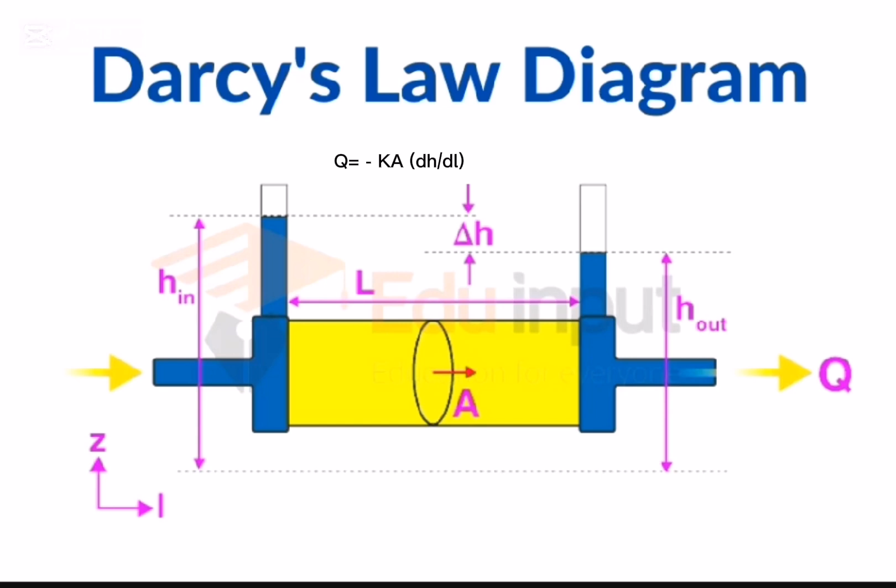So the law can be expressed mathematically as Q equals negative K times A times delta H over delta L, where Q is the rate of water flow, K is the hydraulic conductivity, A is the column cross-sectional area, and delta H over delta L indicates the hydraulic gradient. And here we have the difference in head and length between the manometers, the cross-sectional area, and the inflowing and outflowing. Then this is the porous medium.

In soil science, Darcy's law is crucial for understanding water movement through soil, and it is applied to measure soil permeability and design efficient irrigation and drainage systems. It manages soil water retention and movement, predicts contaminant transport, and controls soil erosion by quantifying the flow rate of water through soil using parameters like hydraulic conductivity, hydraulic head difference, and soil column length. Darcy's law helps in various practical applications such as optimizing irrigation schedules, preventing waterlogging, and mitigating groundwater contamination risk.

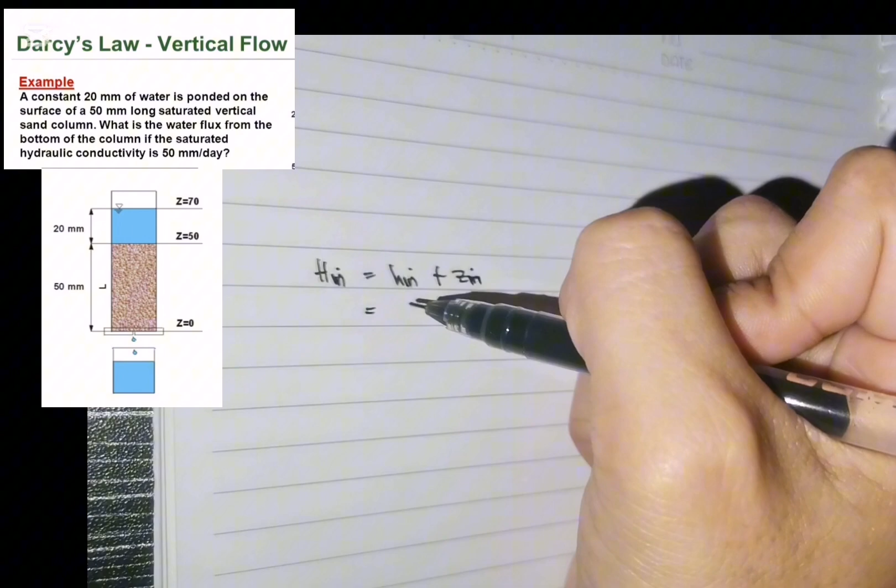So first, we need to define a convenient reference level and designate it as Z equals 0. This is the reference level at the bottom of the sand, Z equals 0. Then calculate the difference in hydraulic head across the soil length. So we have here H sub in is equal to h plus Z, so we have 20 mm plus 50 mm, that will be 70 mm. And for the H sub out, we don't have any value for this, so automatically we put 0.

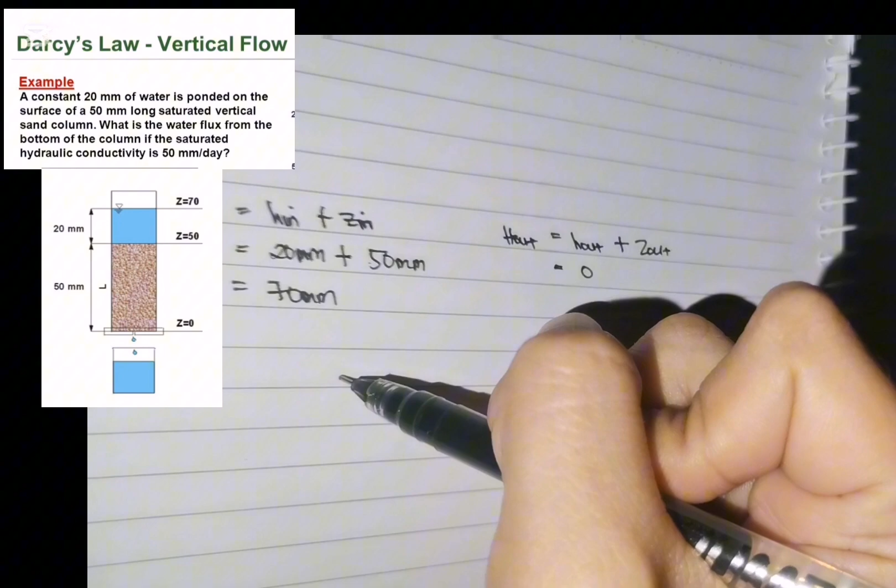And then with this data we can solve the difference in head. So delta H is equal to H sub in minus H sub out. So that will be 70 minus 0, so we have 70 mm. And next is to calculate the hydraulic gradient. So we have here i is equal to delta H over delta Z. So delta H is 70 mm and delta Z is 50 mm, and you can get the value of 1.4. Then calculate the flux.

J sub W is equal to negative K sub S times the gradient, where J sub W is the water flux density and K sub S is the saturated hydraulic conductivity. So we have here 50 times 1.4, the hydraulic gradient, and that will be negative 70 mm per day. With this, we have the negative sign so that the flux is downward.

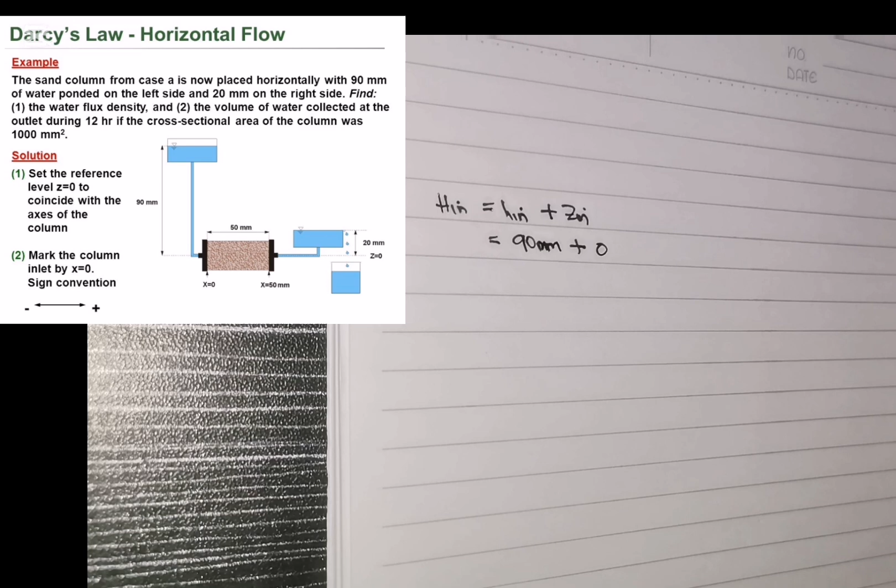So we have here again, the head sub 1 is 90 mm plus 0. We don't have a value in z sub in because we leveled it at the inlet by x equal to 0, so we get 90 mm. For h sub out, we have the head sub 2 equal to 20 mm, and same, we don't have a value for z sub out, so that will be 20 mm. Now we can solve the difference in head. Delta h is equal to h sub in minus h sub out, so that will be 90 minus 20 mm, so we get a value of 70 mm.

Next is to calculate the hydraulic gradient. I is equal to delta h over delta z, so that will be delta h is 70 mm and delta z is this one, 50 mm. So we can get 1.4 for the hydraulic gradient.

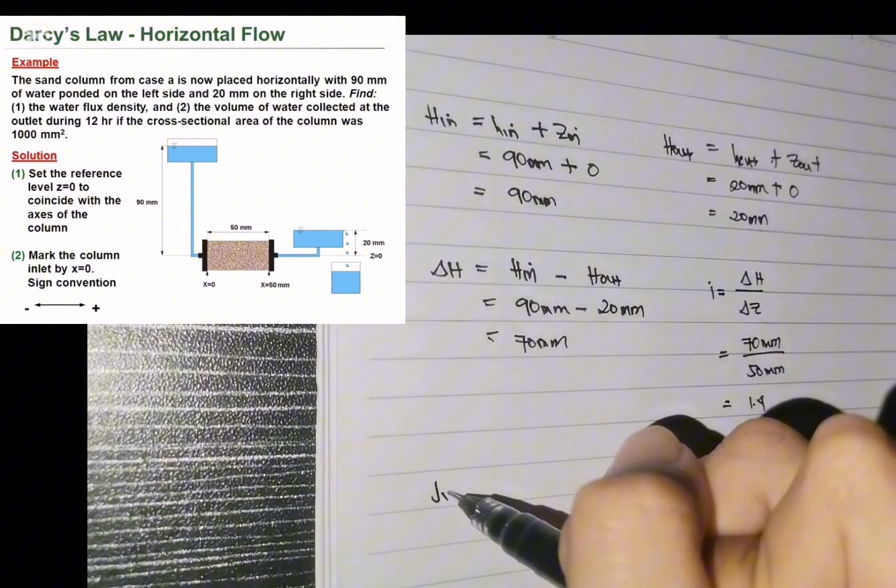Next is calculate the flux. J sub W is the water flux density, and J sub W is equal to negative K sub S times the gradient. So we can copy the sign, 50 times 1.4, and then we can get 70 mm per day or 2.917 mm per hour.

And the last is calculate the cumulative volume of flow. So we have J sub W equal to V over A times T. Derive that formula into V equal to JW times A times T. So with that formula, we can get V equal to 1000 times 12 hours times 2.917, and we get the value of 35004 mm³.

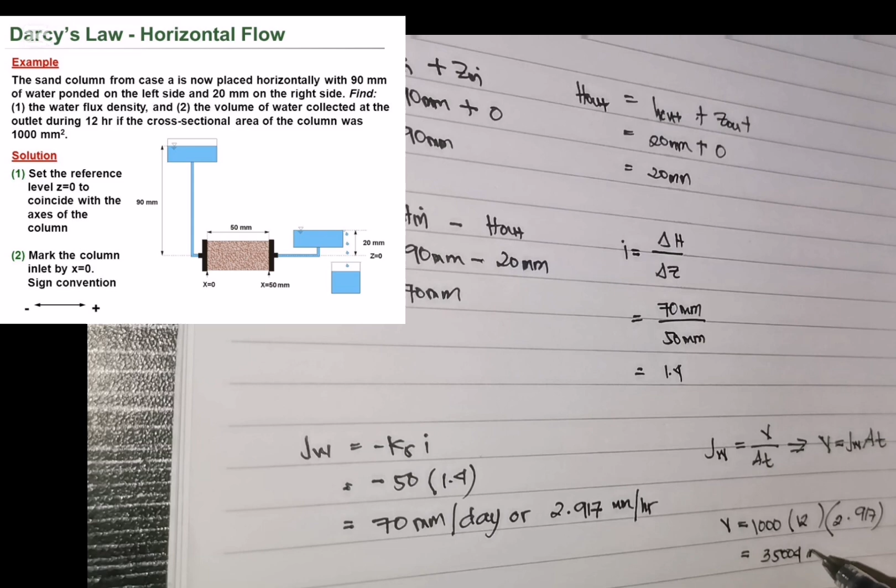So next is groundwater flow in confined aquifer. What is a confined aquifer? A confined aquifer is a geologic formation, sediment, or rock that contains a body of water trapped within sediment underneath the ground by at least one confining layer. So a confined aquifer is a geologic formation, sediment, or rock that contains a body of water.

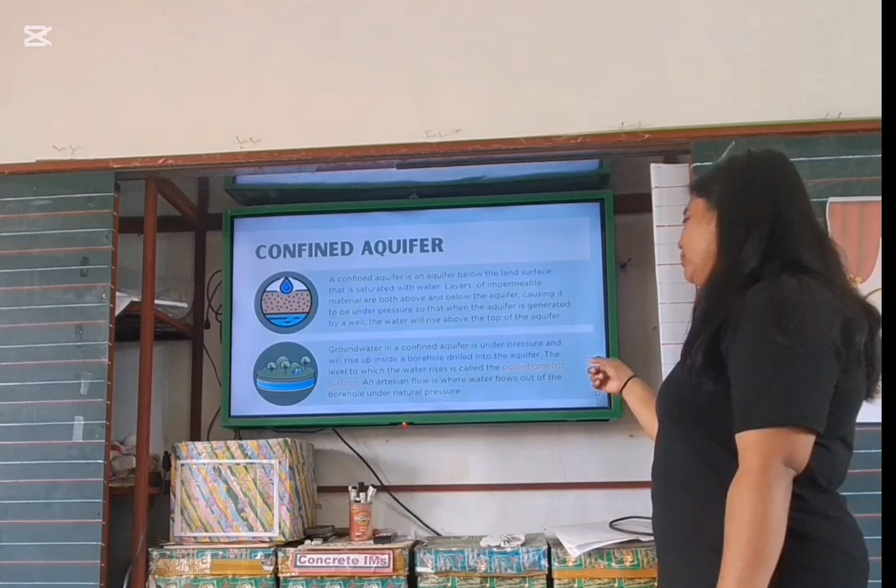An artesian flow is where water flows out of the borehole under natural pressure.

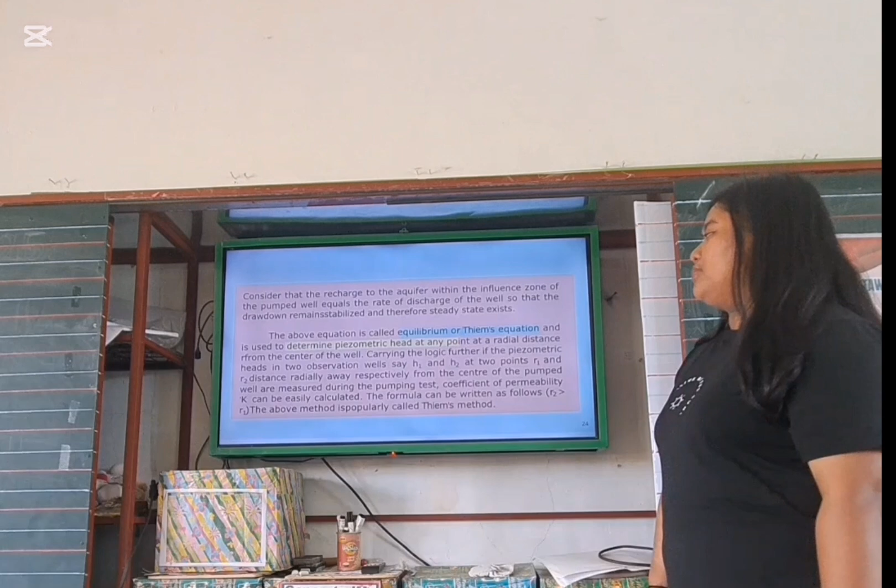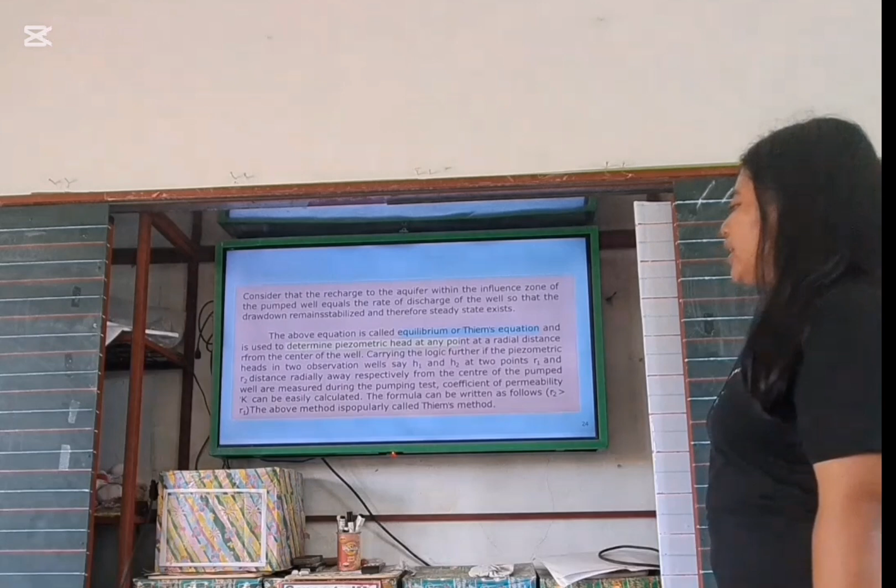Carrying the logic further, if the piezometric heads in two observations, H sub 1 and H sub 2, at two points R sub 1 and R sub 2 distance radially away respectively from the center of the pump well, are measured during the pumping test, coefficients of permeability, K, can be easily calculated. The formula can be written as follows, where R sub 2 is greater than R sub 1. The above method is popularly called Thiem's method.

So this is Thiem's equation now. Calculations of discharge, you can find the aquifer using Thiem's formula for steady radial flow. For steady radial flow, the discharge through a confined aquifer can be calculated from the formula. So what is the formula, guys?

So, steady state radial flow to wells, Thiem equation. Let's do the drawing first. So the formula here is: Q equals 2 pi K times B times S sub 1 minus S sub 2, over Ln of R sub 2 over R sub 1. And K equals Q times Ln of R sub 2 over R sub 1, over 2 pi times B times S sub 1 minus S sub 2.

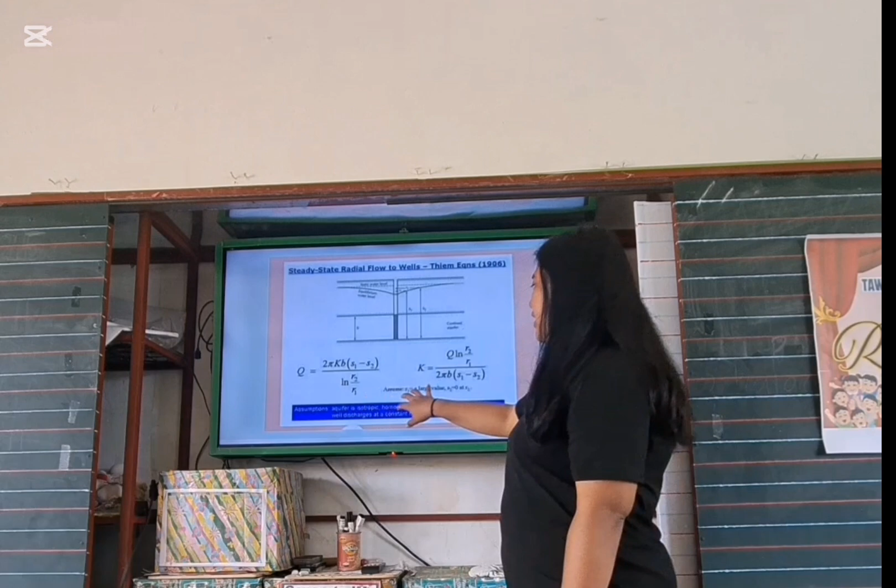The sample problem is: a well is fully penetrated into a 50 feet thick confined aquifer. Water is pumped out at a steady rate of 500 gallons per minute until the following drawdown cone of depression is formed. The initial water level was 100 feet before pumping. Find the hydraulic conductivity in feet per minute for the aquifer.

So here's the drawing, and here's the figure. Now here's the solution. The formula to use is Q equals 2 pi times T times H sub 1 minus H sub 2, over ln of R sub 1 over R sub 2. So let's convert this to get it in feet per minute: 500 gallons per minute times 0.13 feet cube per gallon equals 67 feet cube per minute.

Then, kanina, i-apply na ito siya ng formula. Kuha na siya. So, 67 feet cube per minute equals 2 pi times T. Of course, ang unknown diri is ang T. So, 98 feet minus 80 feet. Why 98 there? Because 100 minus 2 is equals to 98. 100 minus 20 is equals to 80. Ato H sub 1 is 98 feet. Ang ato H sub 2 is 80 feet. Over ln, 400 feet divided by 40 feet. So, T is equals to 1.364 feet squared per minute.

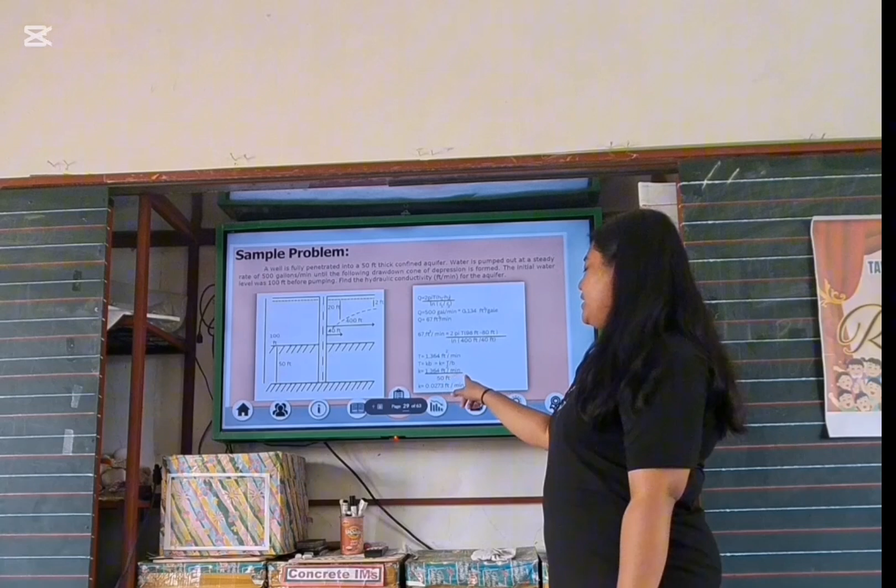So, cancel na siya, feet. So, squared na lang nabilin, kaya cube na siya. T equals KB, so K equals T divided by B. So, since given naman siya ang T, kanya itong gamiton. If wala ang T, mo na siyang formula itong gamiton. Pero ang missing is K man, so, ang atong gigamit ng formula, and given ang T, kanya itong gamiton. So, K equals ang T, of course, kay 1.364 feet squared per minute divided by B. So, atong B is 50 feet. So, K equals 0.0273 feet per minute.

So, mao ito siya itong answer, guys. So, why feet per minute na siya? So, feet squared man na siya, no? So, cancel lang isa ka feet. So, mabilin lang dyan siya feet per minute.

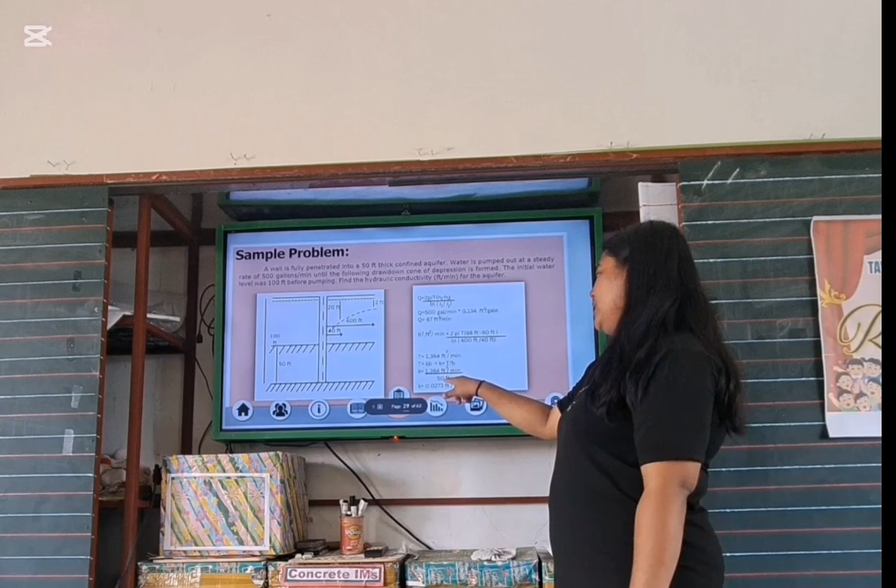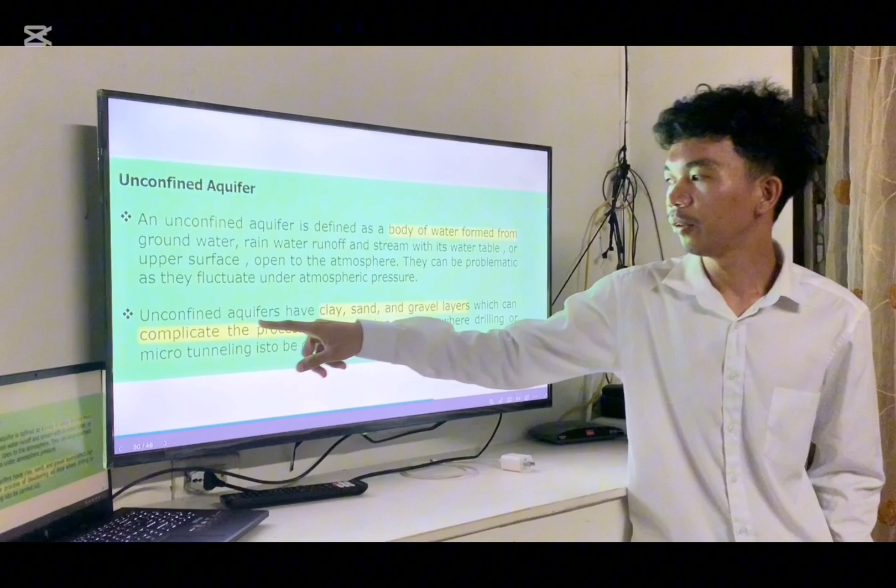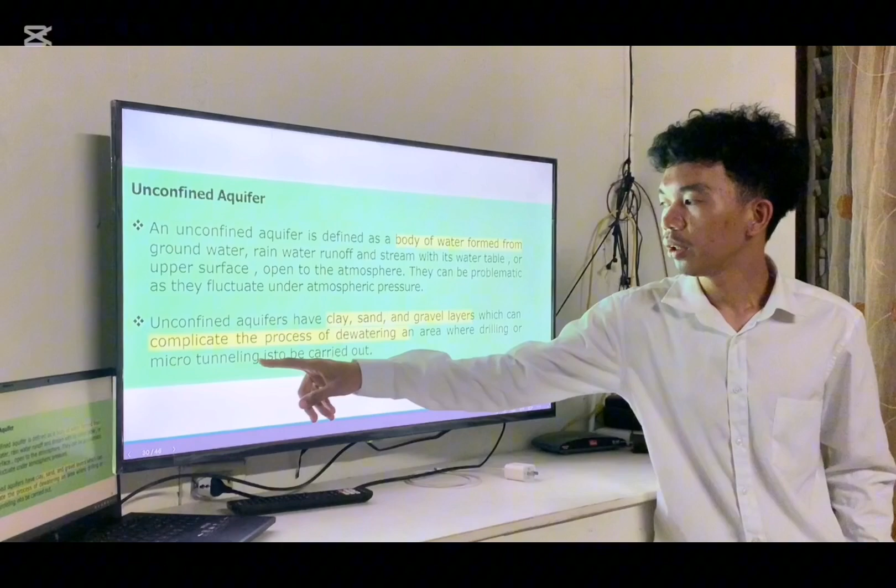Karon atong discuss ang groundwater flow in unconfined aquifer. So, what is unconfined aquifer? So, discuss na ito sa definition sa unconfined aquifer. So, the unconfined aquifer is defined as a body of water formed from groundwater. So, it means it is a form of water nga na-infiltrate from the rain. So, rainwater runoff and stream with its water table or upper surface open to the atmosphere. It can be problematic as it fluctuates under atmospheric pressure. And also, unconfined aquifers have clay, sand, and gravel layers. So, it means ang unconfined aquifer consists of clay, sand, and gravel layers, which can complicate the process of dewatering an area where drilling or microtunneling is to be carried out.

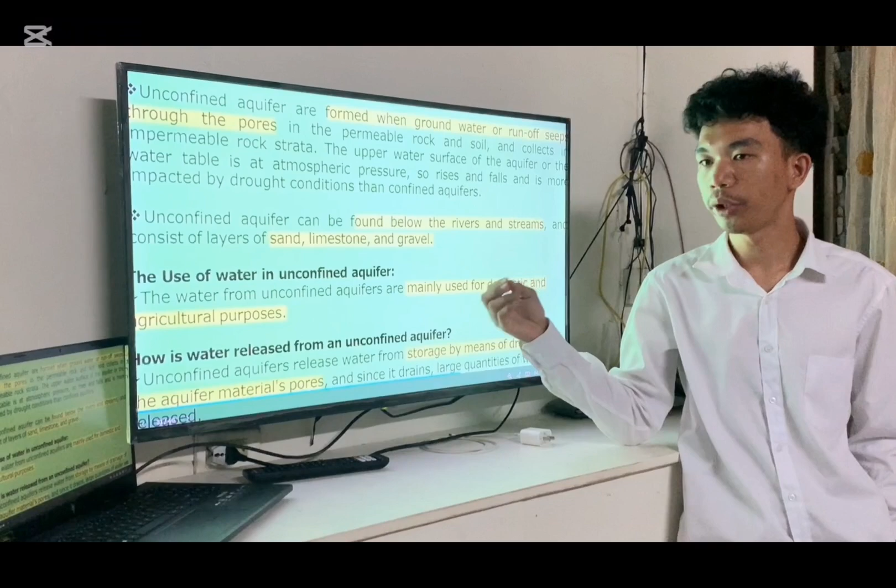And also, unconfined aquifers are formed when groundwater or runoff seep through the pores. So, because of the infiltration from the rain. The upper water surface of the aquifer or the water table is at atmospheric pressure. So, it rises and falls and is more impacted by drought conditions than confined aquifers. So, it means from the word pressure, ang unconfined aquifer is nag-differ po siya about sa pressure. In that particular area, for example, if that particular area has a high pressure, it means mas dako po ang discharge rate sa water. And if it is low pressure, then low po ang discharge rate.

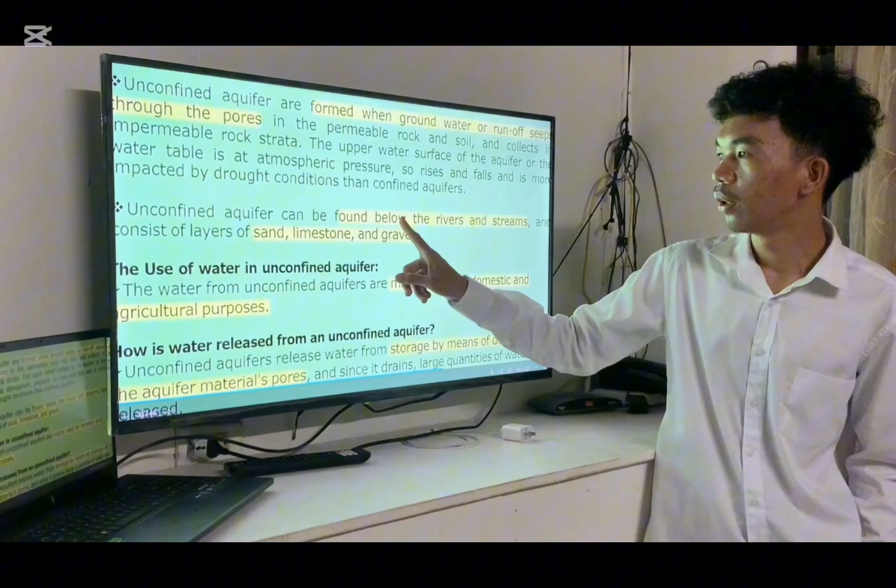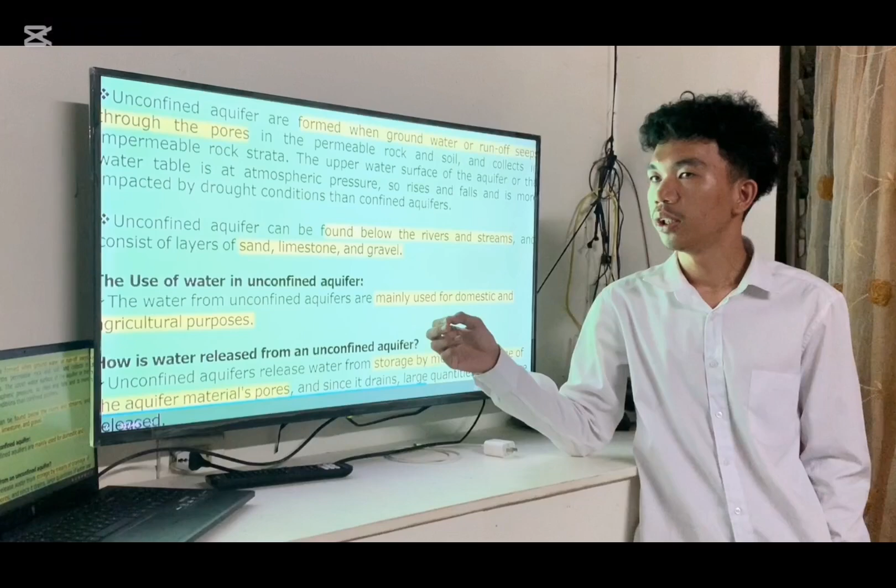And also, unconfined aquifer can be found below the rivers and stream and consists of layers of sand, limestone, and gravel. So now proceed tayo sa uses sa water sa unconfined aquifer. So, the water from unconfined aquifers are mainly used for domestic and agricultural purposes. So, dako kay tabang ang unconfined aquifers because of this one, agricultural purposes. Like for example, sa mga basakan. Diba, ang pananum is need sila of water, then magdigra ka og sa land surface para makakuha og water.

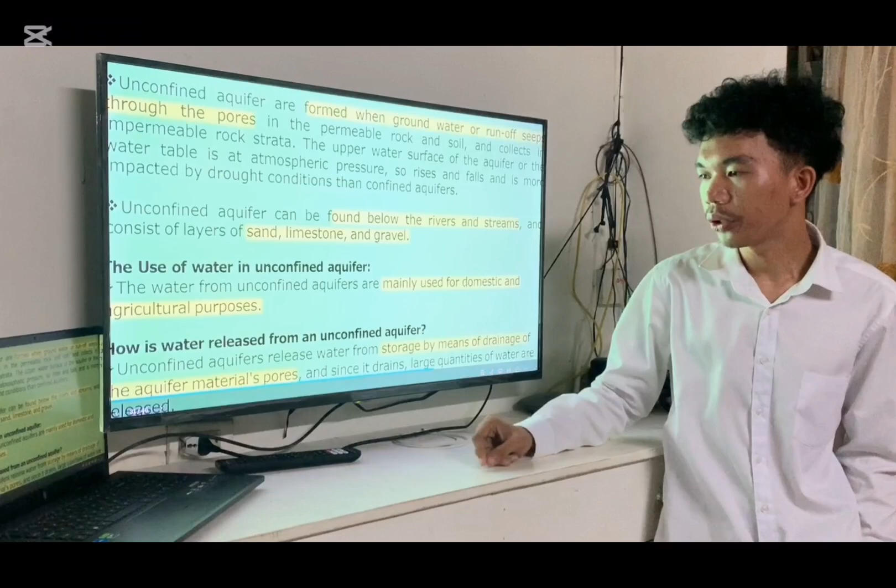Then, how is water released from unconfined aquifer? Unconfined aquifers release water from storage by means of drainage of the aquifer material pores. And since it drains, large quantities of water are released. So, it means ang water ma-release siya through storage. And if maano siya, drain, then there's a lot of water nga ma-release po siya.

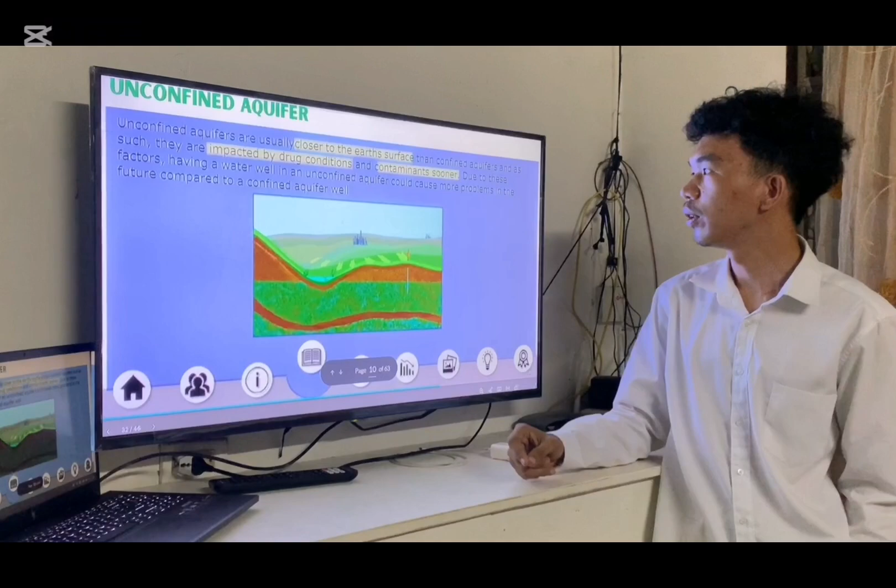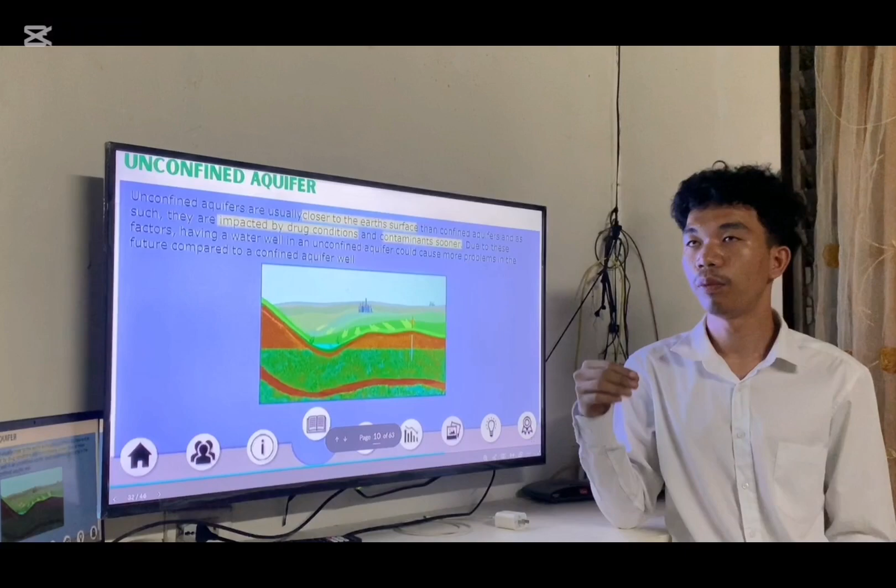Now proceed ta sa, as you can see here, na illustration about sa unconfined aquifer. So, unconfined aquifers are usually closer to the Earth's surface than confined aquifers, and as such, they are impacted by drought condition and contamination. So, it means ang unconfined aquifers is mas dulo sa land surface. So, i-explain nato, it means mas prone sila sa mga pollutant or something like that, kay mas dulo sila sa land surface, which is sa mga human-made activities. Para din ang water quality nila, dili siya totally clear because of mas dulo sila sa land surface compared sa confined aquifer daw.

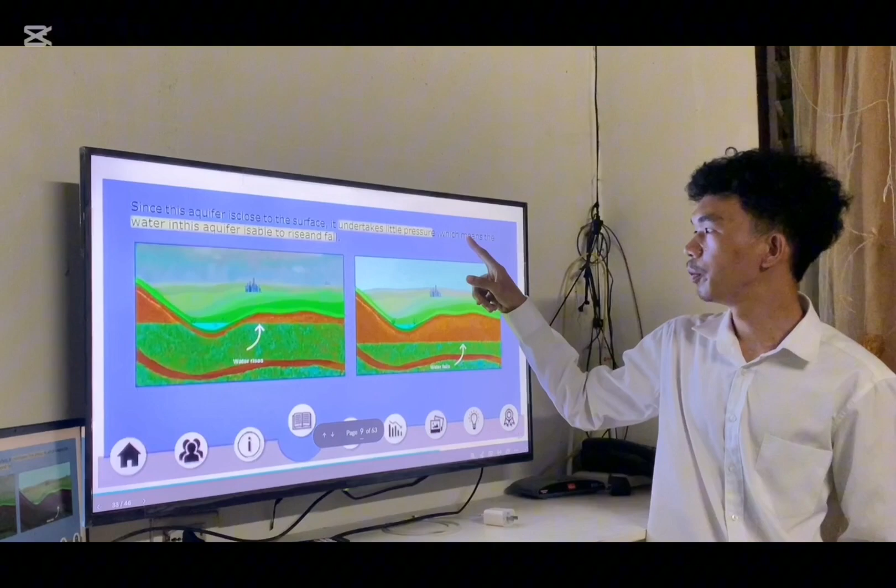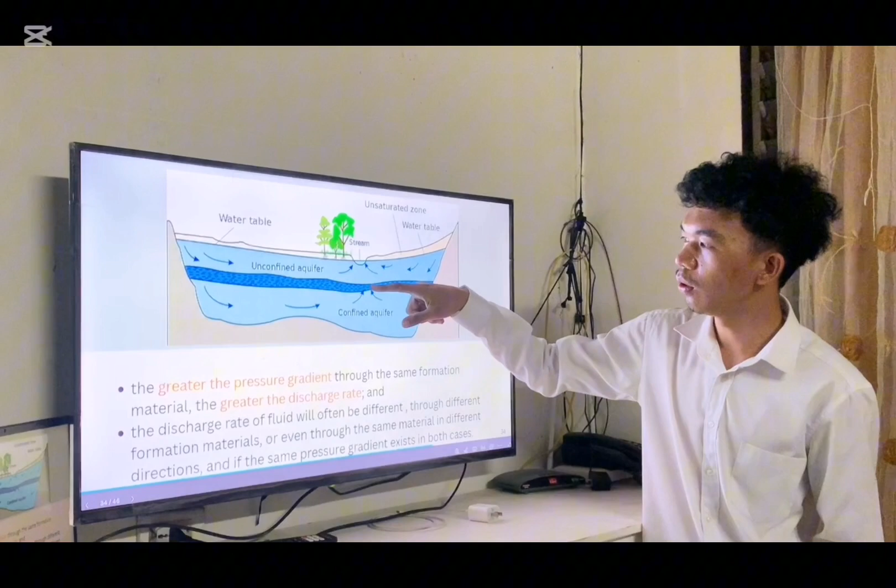Since this aquifer is close to the surface, it undertakes little pressure, which means the water in this aquifer is able to rise and fall. So as you can see here, ang water may rise because of having a high pressure. And diri, ang water nipaubos because of na siya low pressure. So now proceed ta diri. So as you can see sa illustration, this one is the water table, and this is the unconfined aquifer. Then below the unconfined, gitawag din siya og confining bed. And also below the confining bed, it is called confined aquifer.

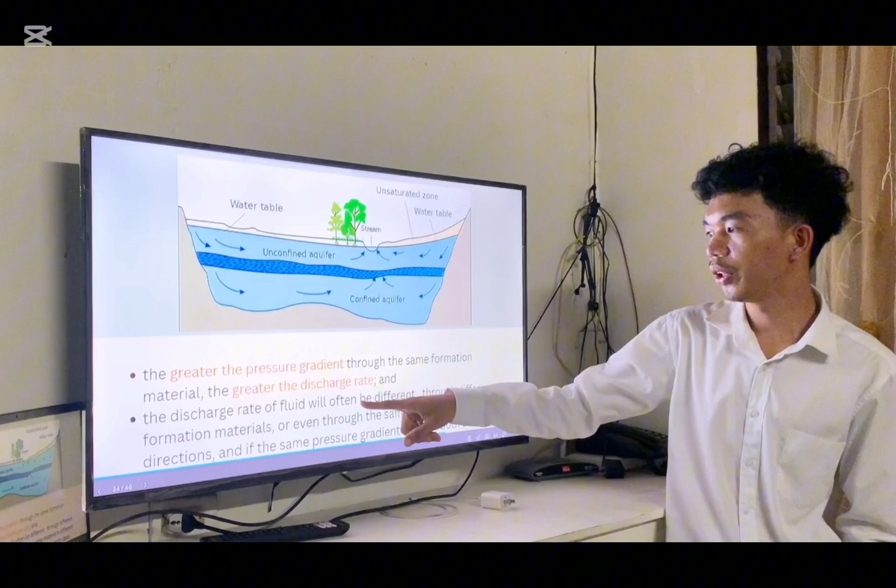So, the greater the pressure gradient through the same formation material, the greater the discharge rate. So, if ang pressure nag-contain siya og high pressure, ang discharge rate po is mas dako. And if it is lowest, then the discharge rate also lowest. So the discharge rate of fluid will often be different through different formation materials or even through the same material in different direction, even if the same pressure gradient exists in both cases.

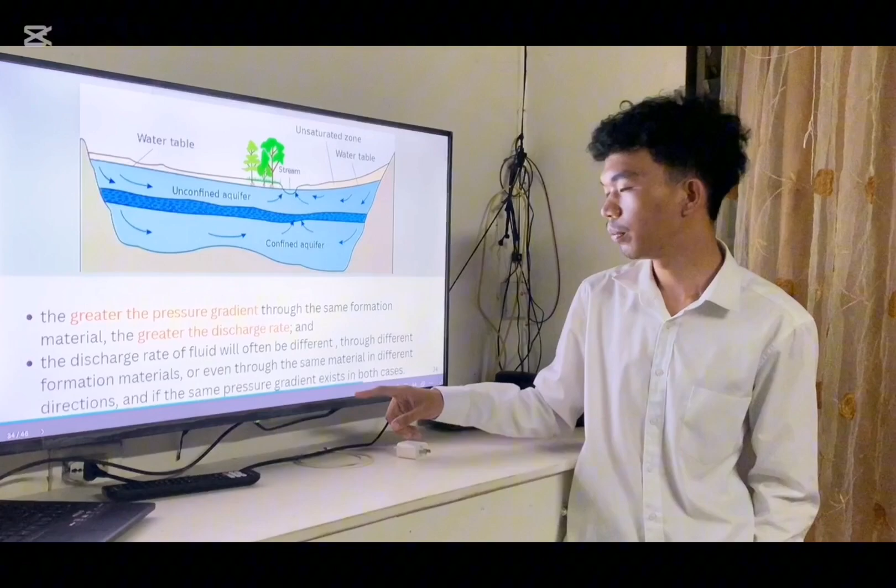Now let's proceed to the question. How does an unconfined aquifer recharge?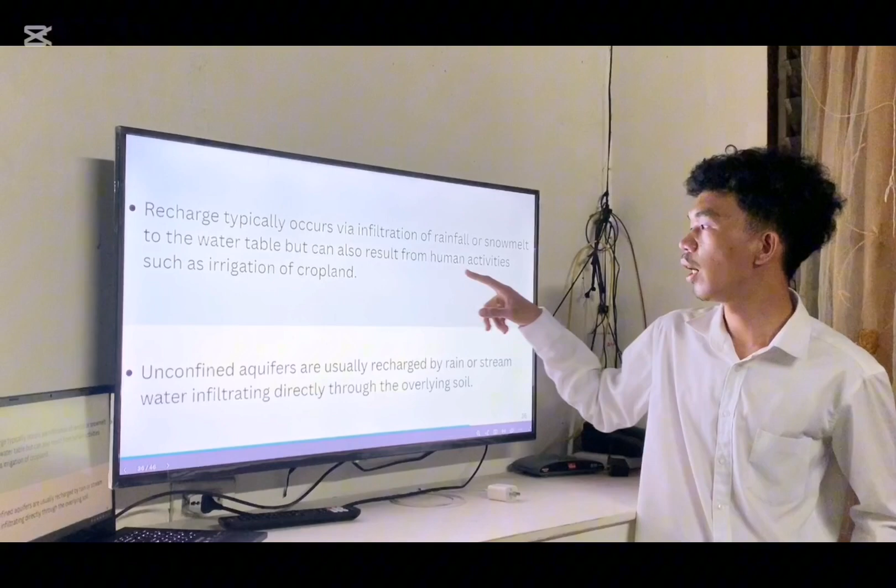Typically, an unconfined aquifer is recharged through infiltration of rainfall. For example, if it rains heavily, water from the rain moves toward the land surface, enters the pores of the land, and reaches the placements of the unconfined aquifer. It can also result from human activities such as irrigation of cropland. Unconfined aquifers are usually recharged by rain or streams, with water infiltrating directly through the overlying soil.

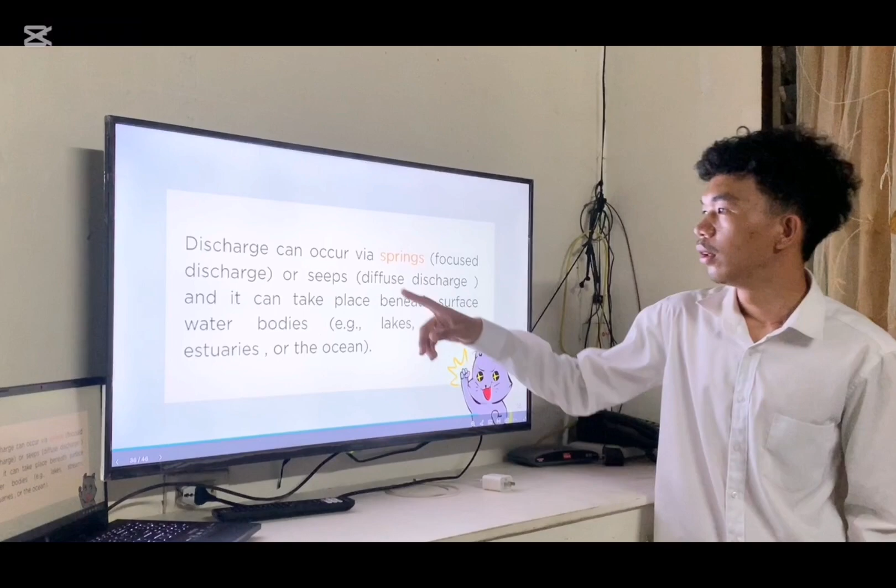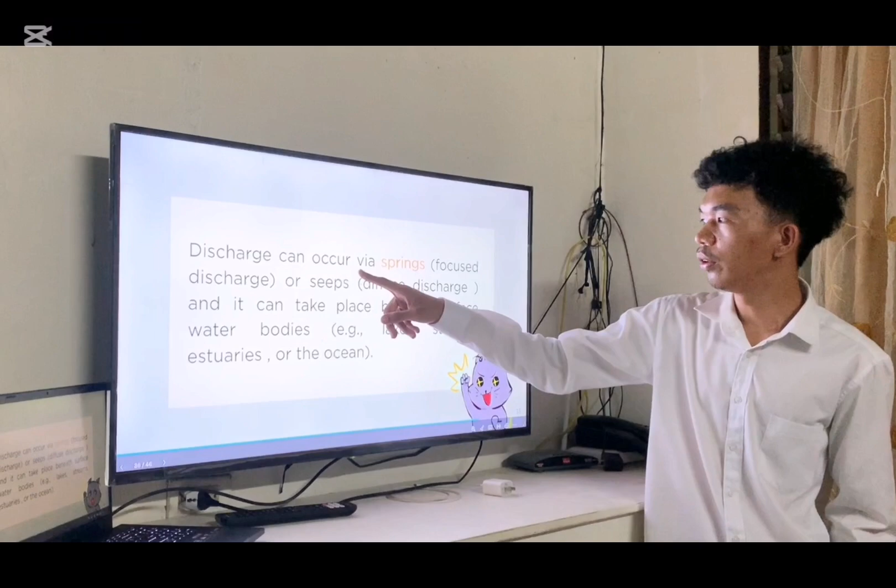So now, about how an unconfined aquifer discharges. Discharge can occur via springs. So the question here is how unconfined aquifers discharge, and the answer is discharge can occur via springs, focused or diffuse discharge, and it can take place beneath surface water bodies like lakes, streams, estuaries, or the ocean.

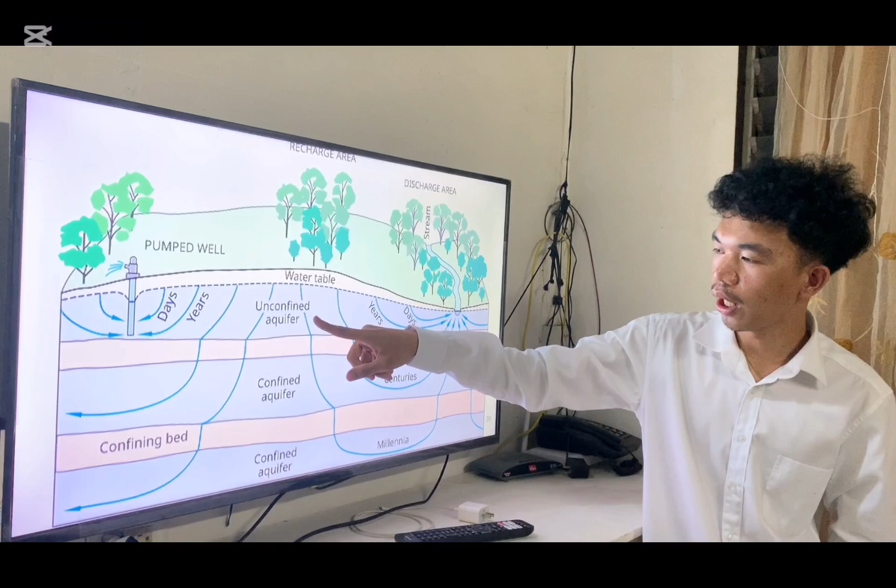Now let's proceed to the illustration. The illustration contains two aquifers: the unconfined and also the confined. As you can see here, this is the placement of the recharge area.

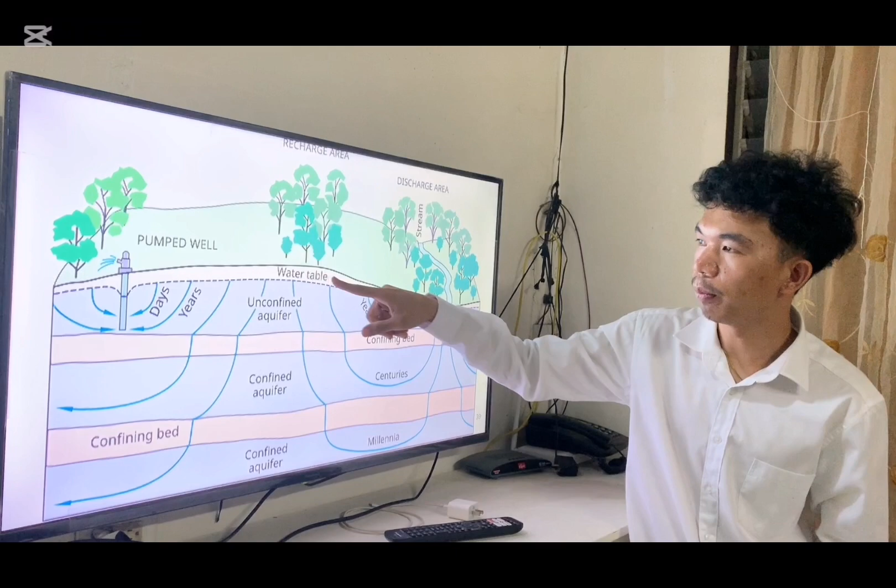If it rains or snows, the water moves toward the water table. This is the placement of the recharge area. This is the land surface or the water table, and below that is called the unconfined aquifer. Below that is a layer we call the confining bed, and below the confining bed we call it the confined aquifer.

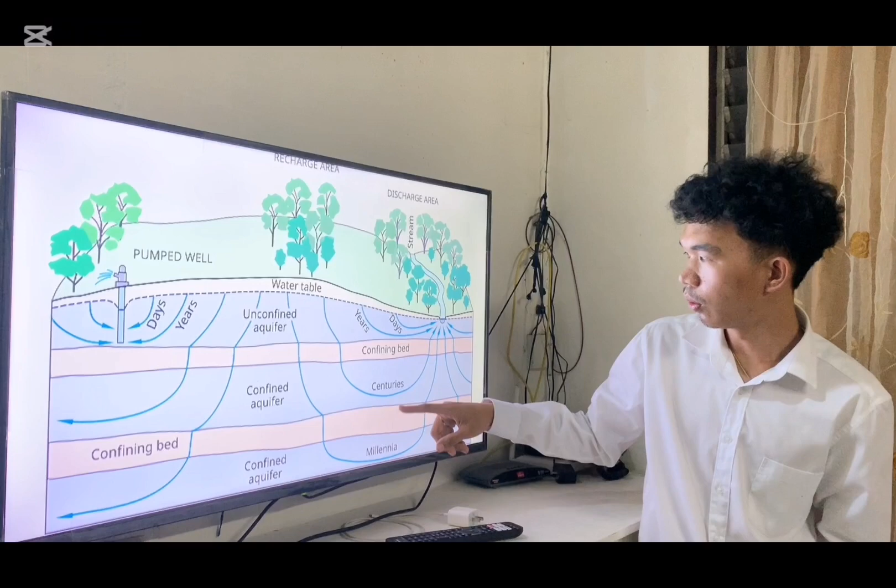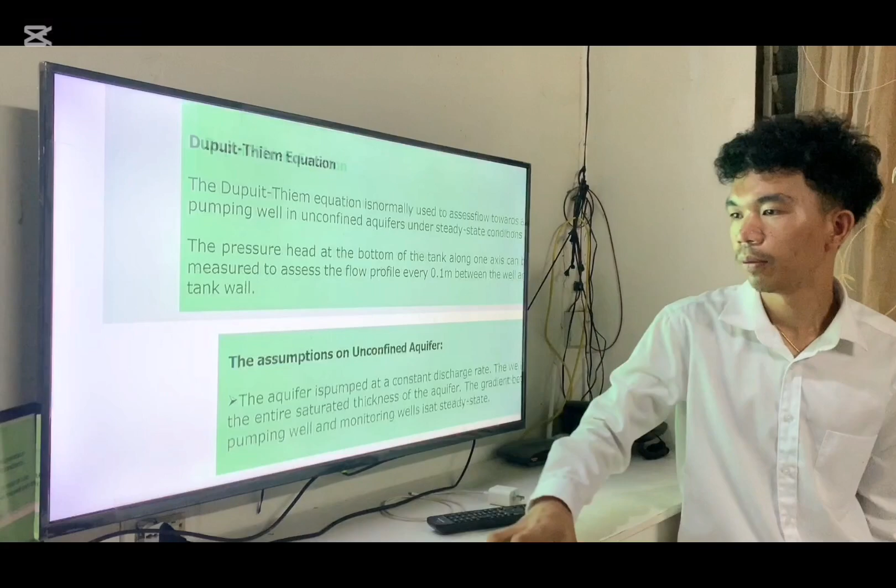As you can see, the direction of the flow of water moves toward the stream, where it gets discharged. Now let's proceed to the problem and equation about the unconfined aquifer, which we call the Dupuit-Thiem equation.

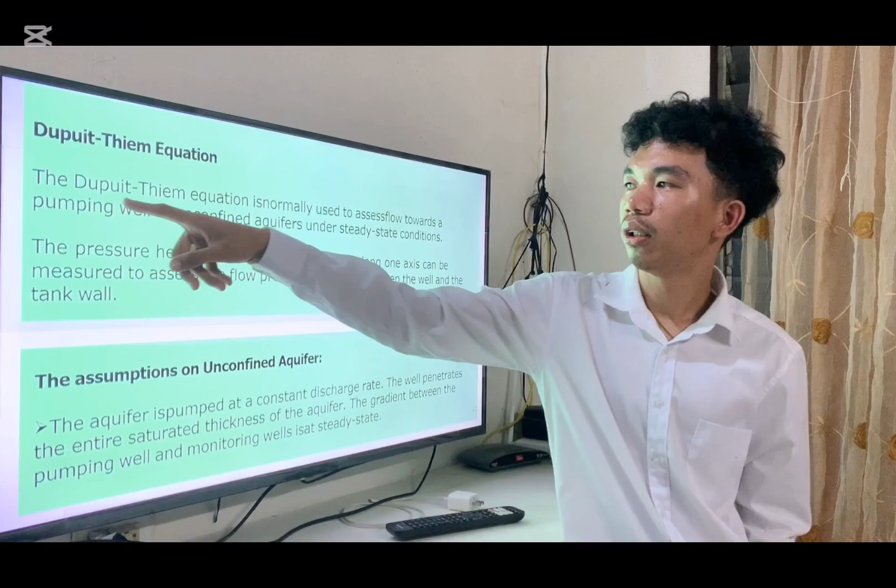The Dupuit-Thiem equation is normally used to assess flow towards a pumping well in unconfined aquifers under steady state condition. The pressure head at the bottom of the tank along one axis can be measured to assess the flow profile every 0.1 meter between the well and the tank wall.

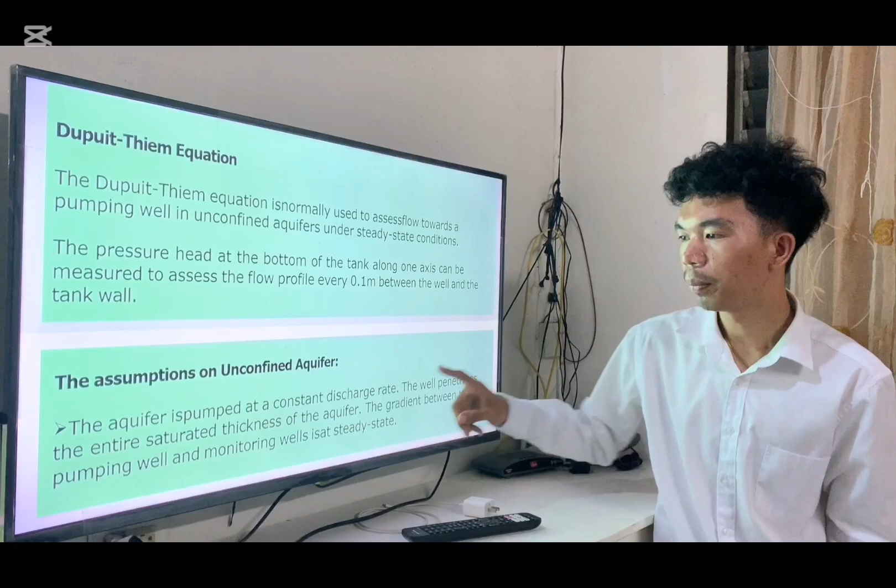So the assumptions of the unconfined aquifer are: the aquifer is pumped at a constant discharge rate, the well penetrates the entire saturated thickness of the aquifer, and the gradient between the pumping well and the monitoring well is at steady state.

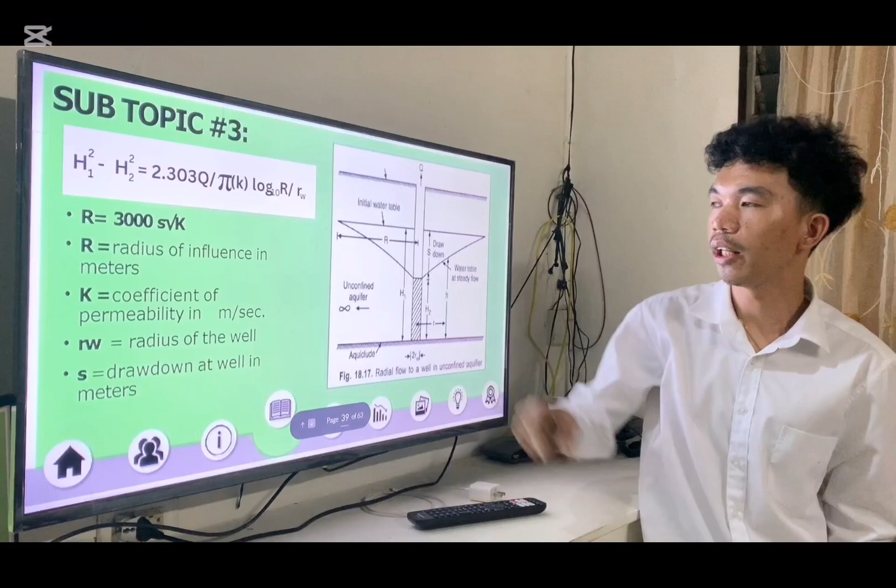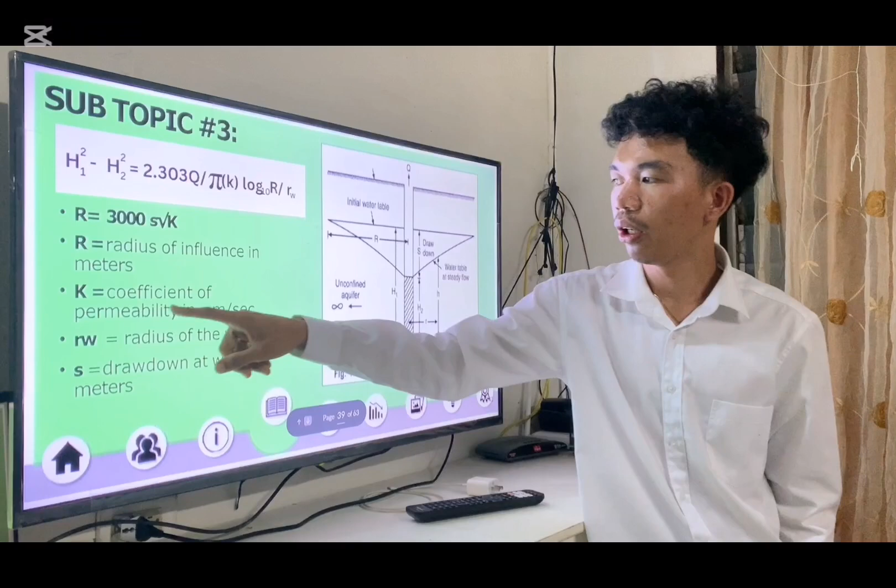So this will be the formula for unconfined aquifers, the Dupuit-Thiem equation. The formula is H sub 1 squared minus H sub 2 squared equals 2.303Q over pi times K, logarithm base 10 of R over R sub W, where R is the radius of influence in meters, K is the coefficient of permeability in meter per second, R sub W is the radius of the well, and S is the drawdown at the well in meters.

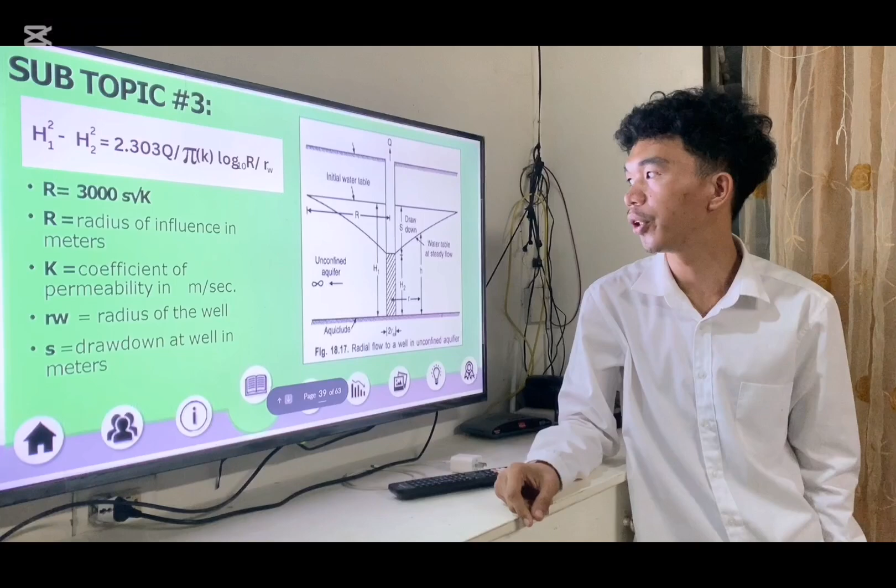So this will be the figure of the unconfined aquifer or the Dupuit-Thiem equation. Now we have a sample problem.

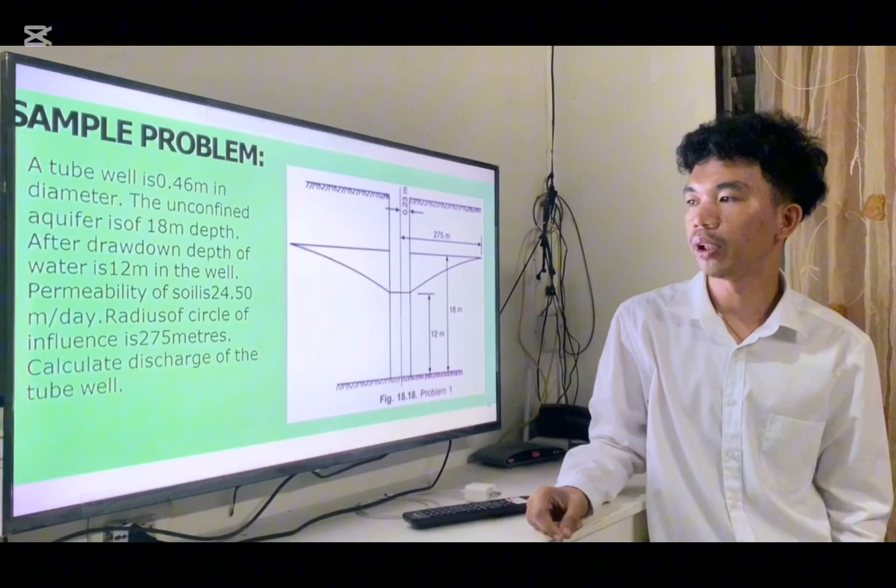A tube well is 0.46 meter in diameter. The unconfined aquifer is 18 meters deep. After drawdown, the depth of water is 12 meters in the well. Permeability of soil is 24.50 meters per day. Radius of circle of influence is 275 meters. Calculate the discharge of the tube well.

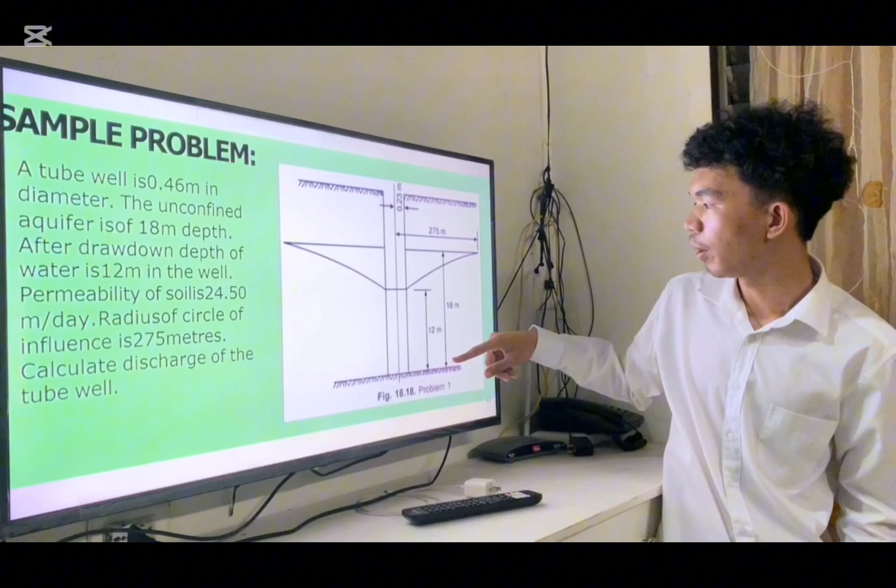This will be the figure of that problem. Height number 1 is 18 meters and height number 2 is 12 meters. This will be the figure of that sample problem, and this will be the solution, but I'm going to show you the complete solution later.

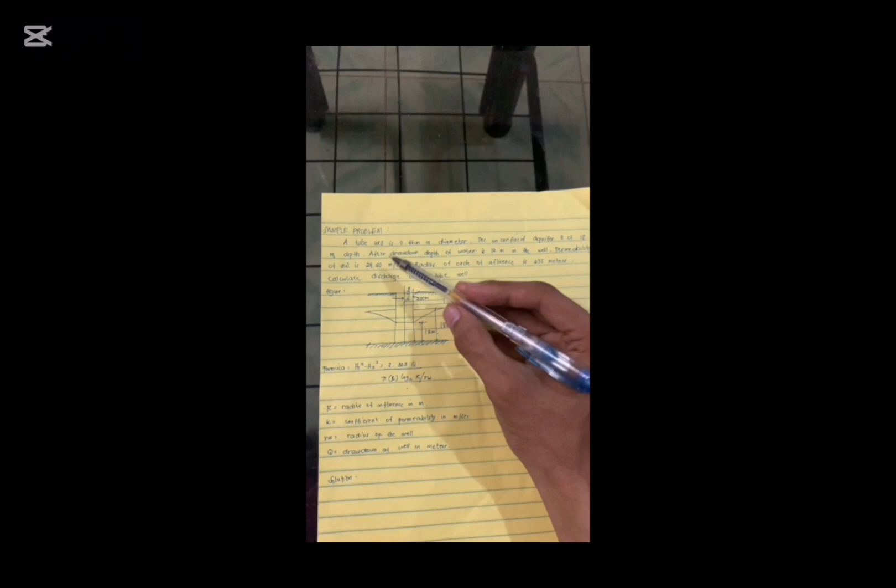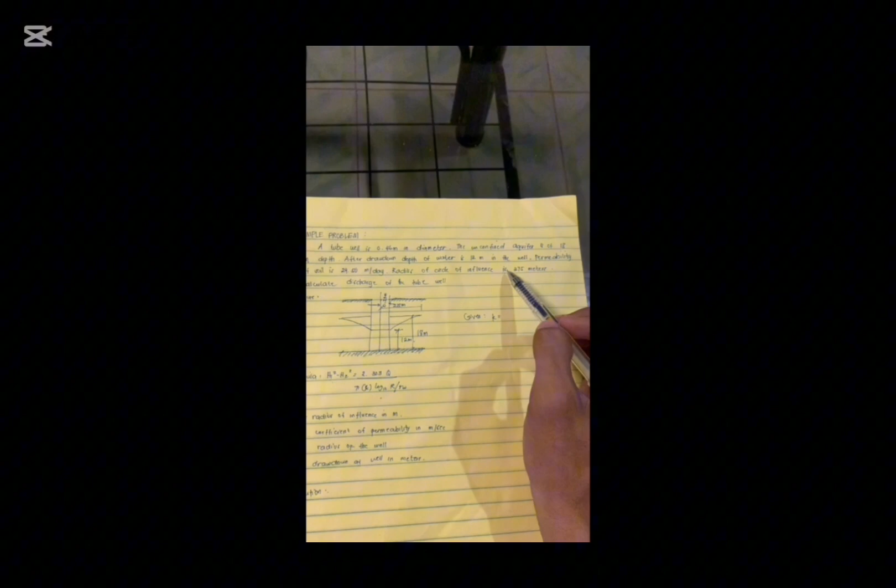So we have a sample problem about the Dupuit-Thiem equation. A tube well is 0.46 meter in diameter. The unconfined aquifer is 18 meters deep. After drawdown, the depth of water is 12 meters in the well. Permeability of soil is 24.50 meters per day. Radius of circle of influence is 275 meters. Calculate the discharge of the tube well.

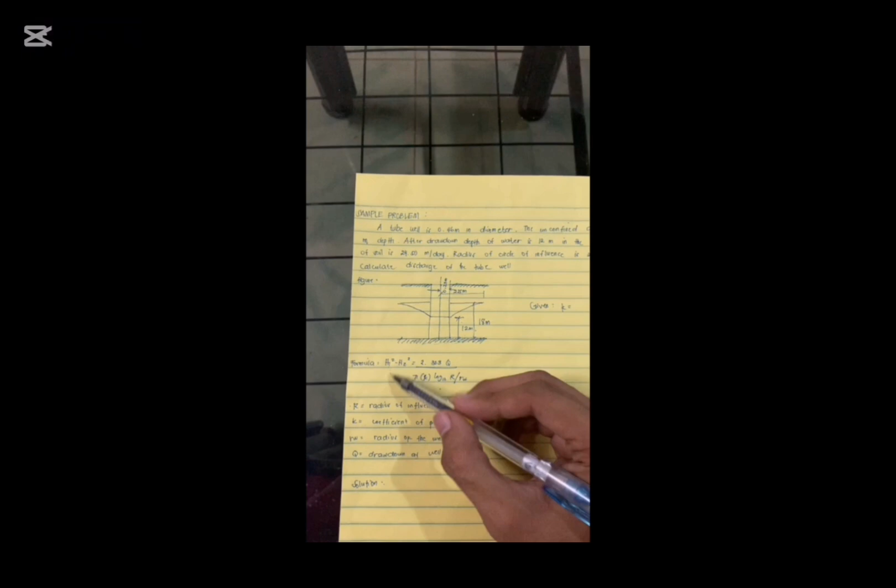This will be the figure of this sample problem. Our first height is 18 meters, the second is 12 meters. Using this formula, R is the radius of influence in meters, K is the coefficient of permeability in meter per second, R sub W is the radius of the well, and Q is the drawdown of the well in meters.

So what's given to us: the value of K is 24.50 meters per day. The R, or radius of influence, is 275 meters. The radius of the well is 0.23 meter. And height number 1 is 18 meters, height number 2 is 12 meters. So this will be the given values in the sample problem.

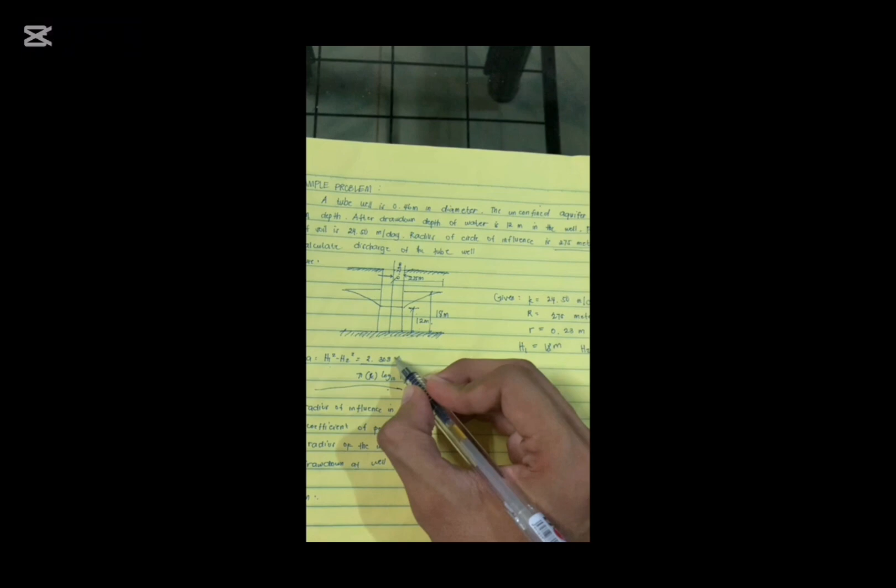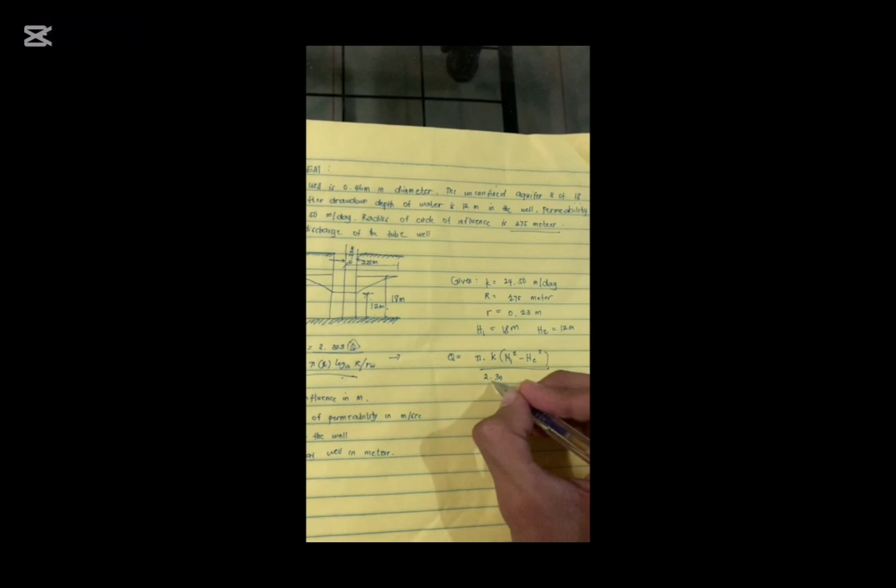Using this formula, what we are solving for is Q. So instead of using it directly, we derive it into this form: Q equals pi times K times height number 1 squared minus height number 2 squared, over 2.303 times the logarithm base 10 of R over R sub W.

So let's substitute the values into this formula. We input this in the calculator: pi times 24.5, and then the height, which is 18 squared minus 12 squared. This will be height number 1 and height number 2 according to this figure. So the answer is 180.

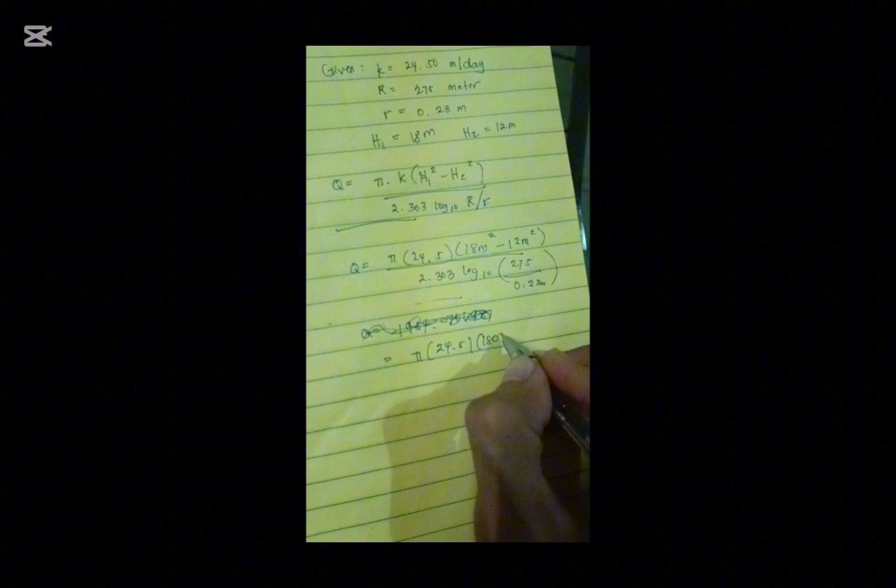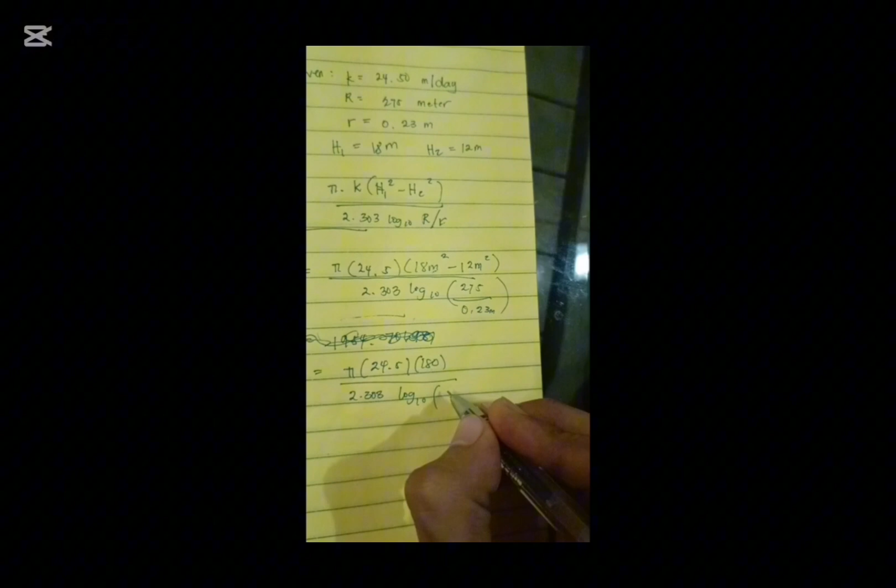So we multiply that by 180, and then copy this one. This is a standard value, 2.303, then this one. So the answer is logarithm 10 of 275 over 0.23, which is 1195.65, or if we round it up, 1195.65. That's it, guys.

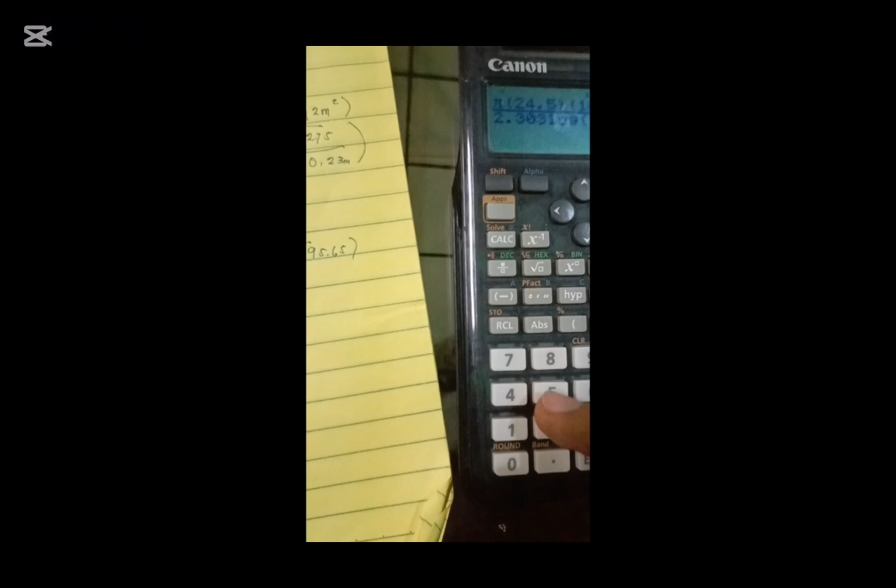Then we input this in the calculator: then pi times 24.5, and then 180, and then 2.303, then times the logarithm, which is 1195.65. So our answer is 1954.707 meter cube per day. This will be the answer to the problem, which is the discharge of the tube well. So our answer is 1954.707 meter cube per day.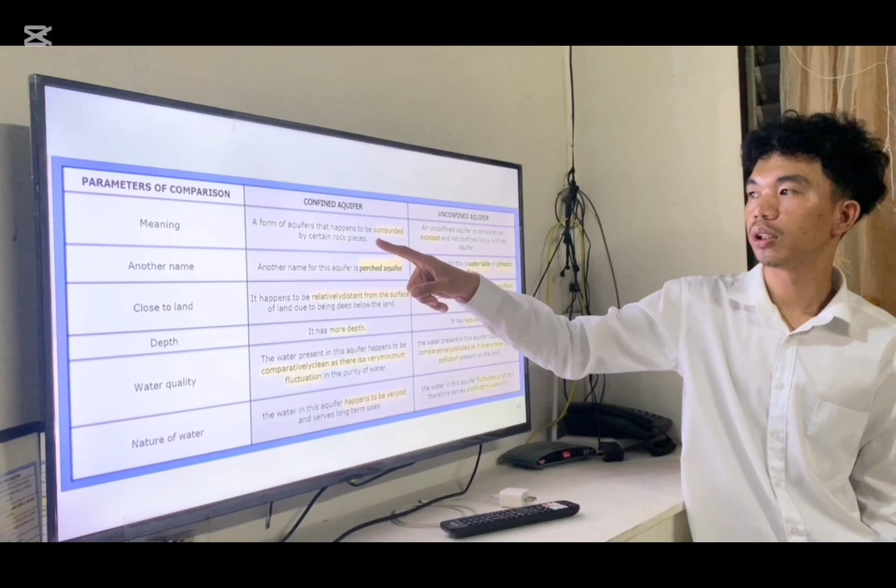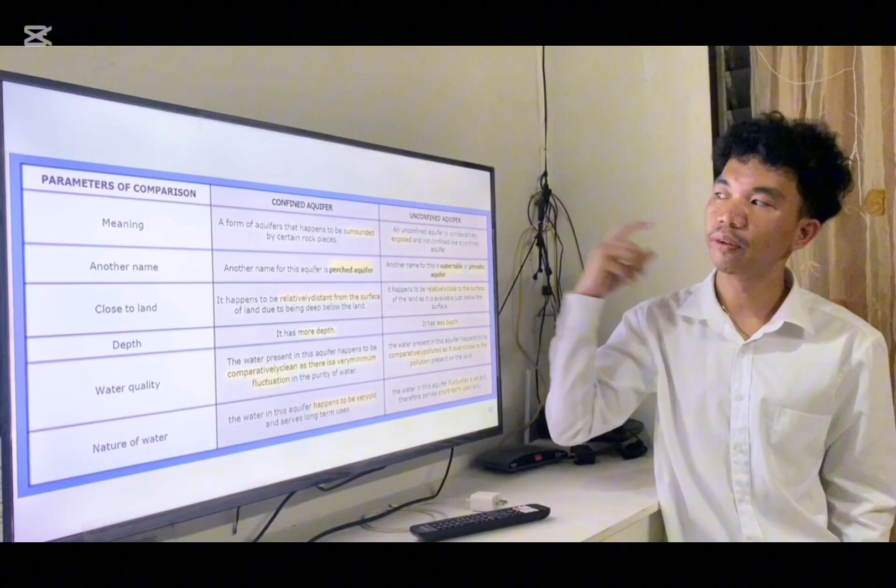The confined aquifer is a form of aquifer that is surrounded by certain rock pieces, while the unconfined aquifer is comparatively exposed and not confined like a confined aquifer. It is closer to the land surface, unlike the confined one, which is enclosed and surrounded by certain rock pieces. Now for the other name: the other name of the confined aquifer is perched aquifer, while the unconfined we call a water table or phreatic aquifer.

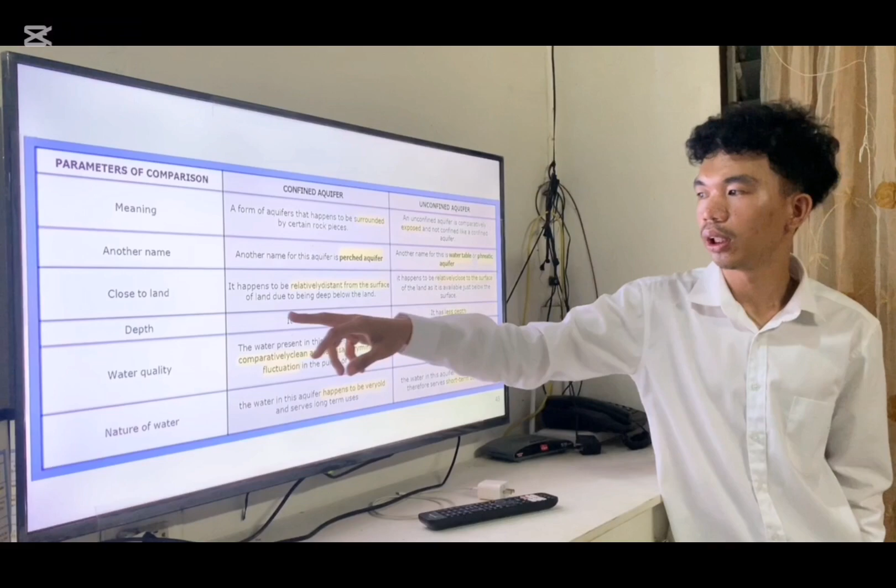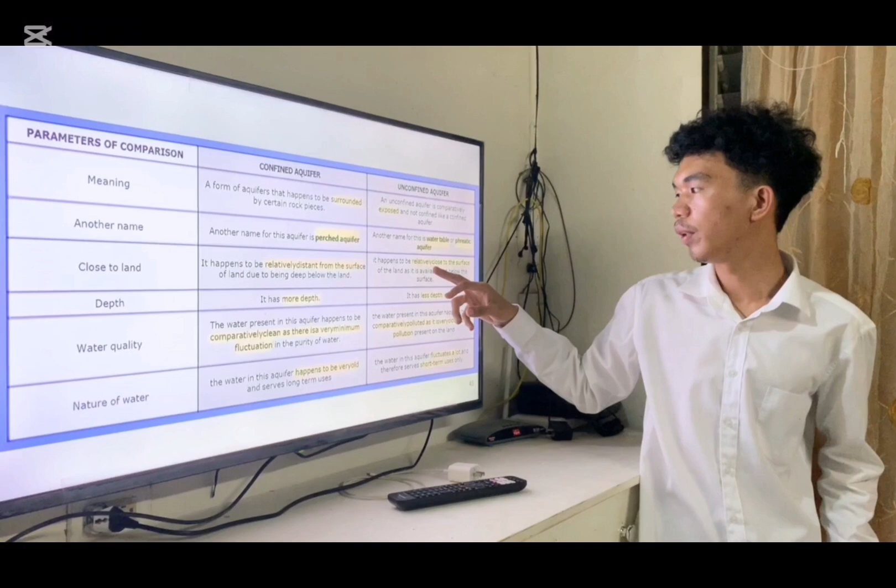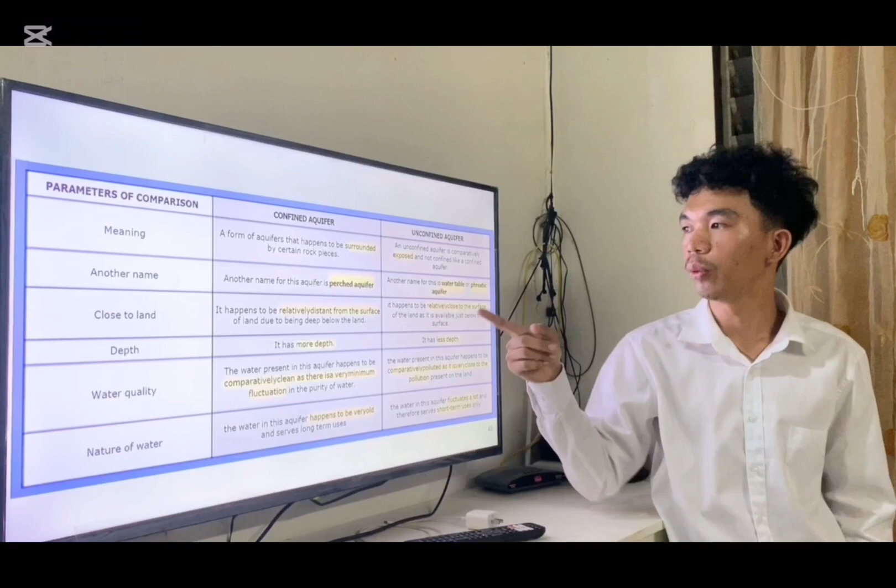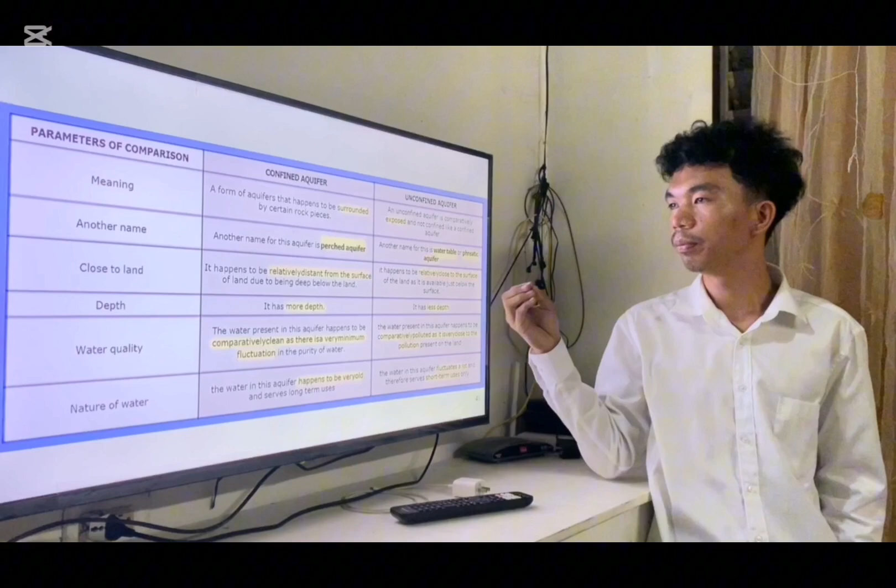About being close to land: the confined aquifer is relatively distant from the surface, so it is farther from the land surface compared to the unconfined, which is relatively close to the surface. As we know, we have 3 layers of the earth: the crust, the mantle, and the core. The confined aquifer's placement is probably between the crust and the core, in the mantle. The unconfined aquifer's placement is in the crust. About depth, the confined has more depth because it is farther from the land surface, while the unconfined has less depth because it is closer to the land surface.

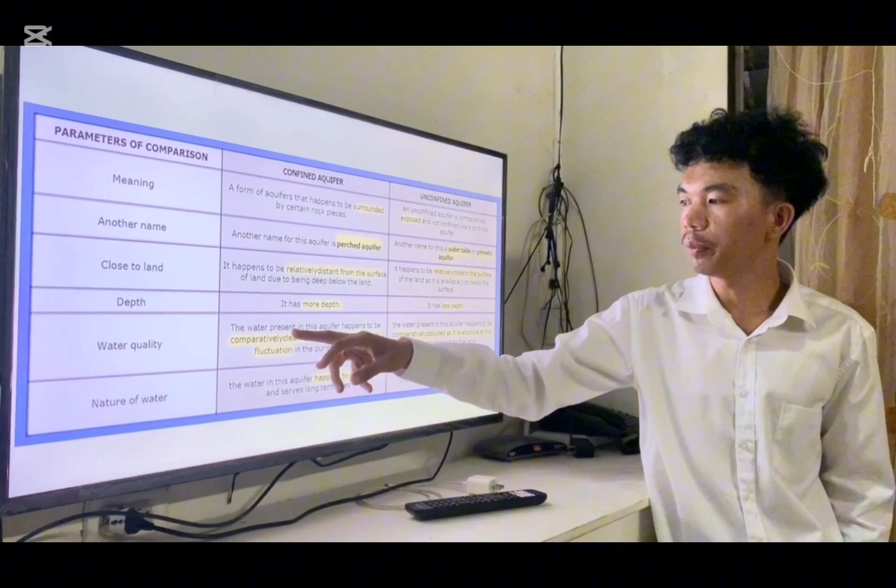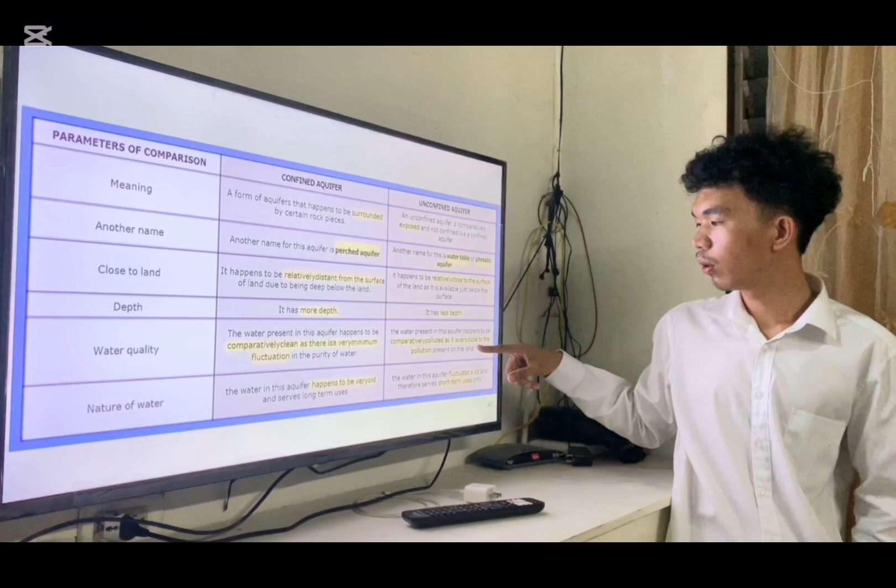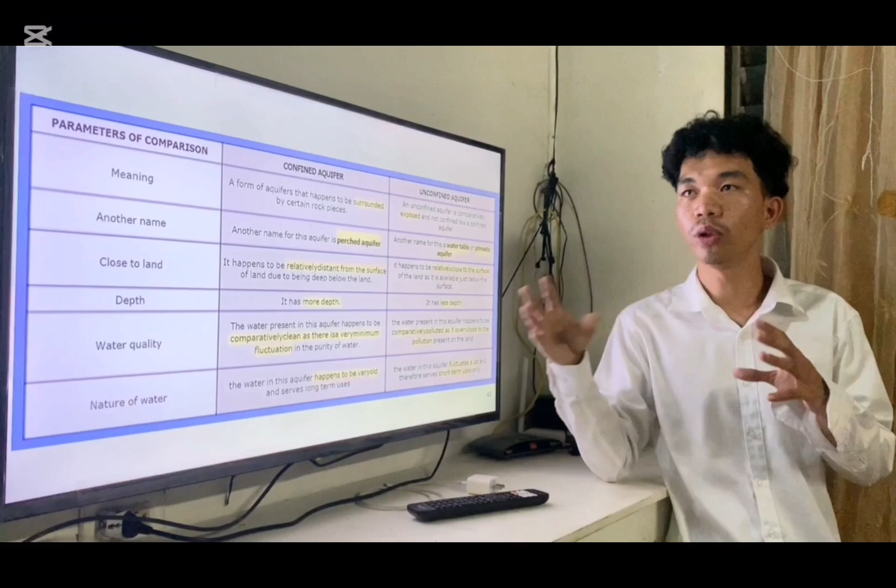About water quality, the water present in the confined aquifer is comparatively clean as there is very minimum fluctuation. What does it mean, guys? The water quality in the confined aquifer is cleaner compared to the unconfined because it is farther from human-made activities, unlike the unconfined, whose placement is near the land surface. So the water present in the unconfined aquifer is comparatively polluted and very close to the pollution. It is more prone to human-made activities, for example people throwing garbage and decomposition. Therefore the water is not very clear, unlike the confined one, which is at the very bottom of the land.

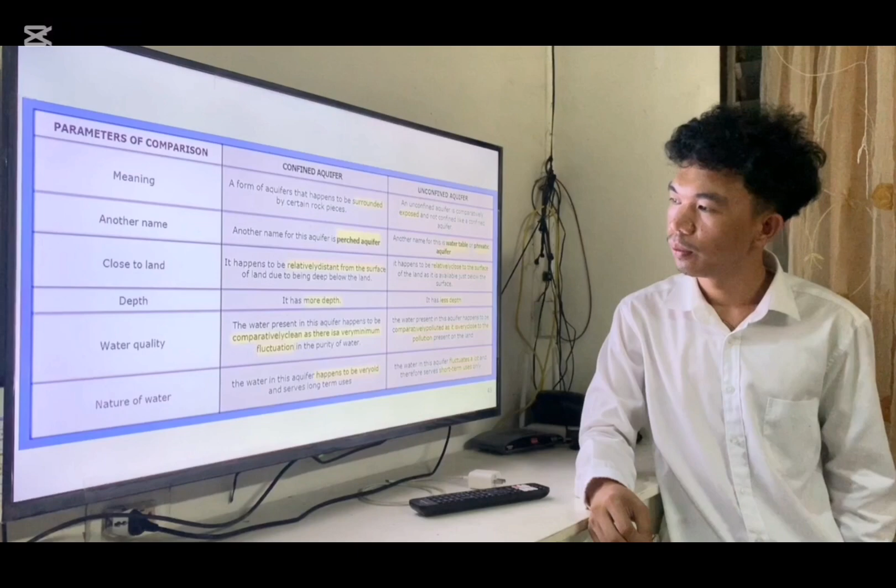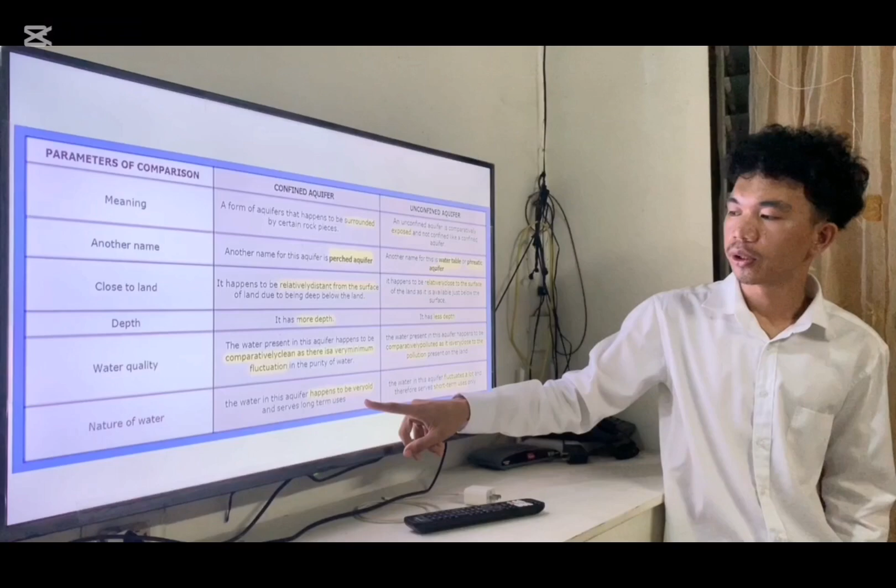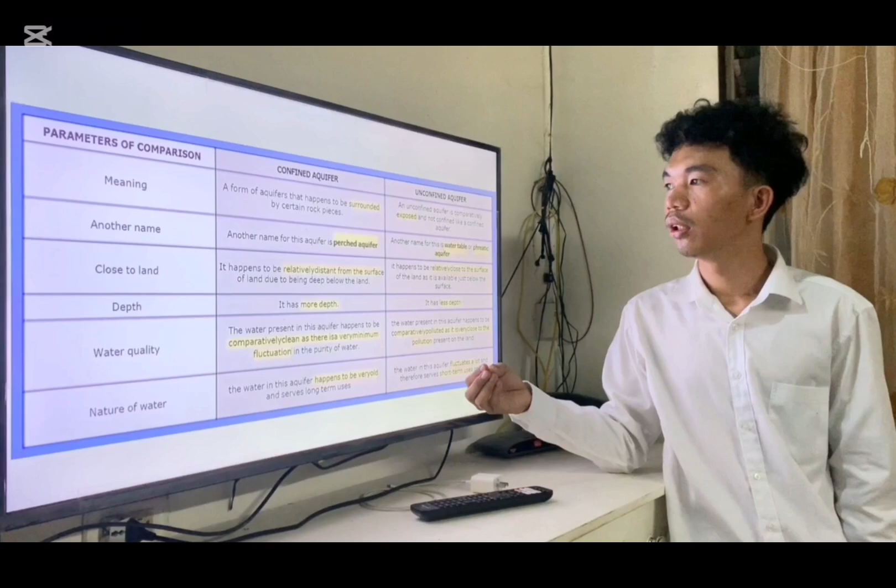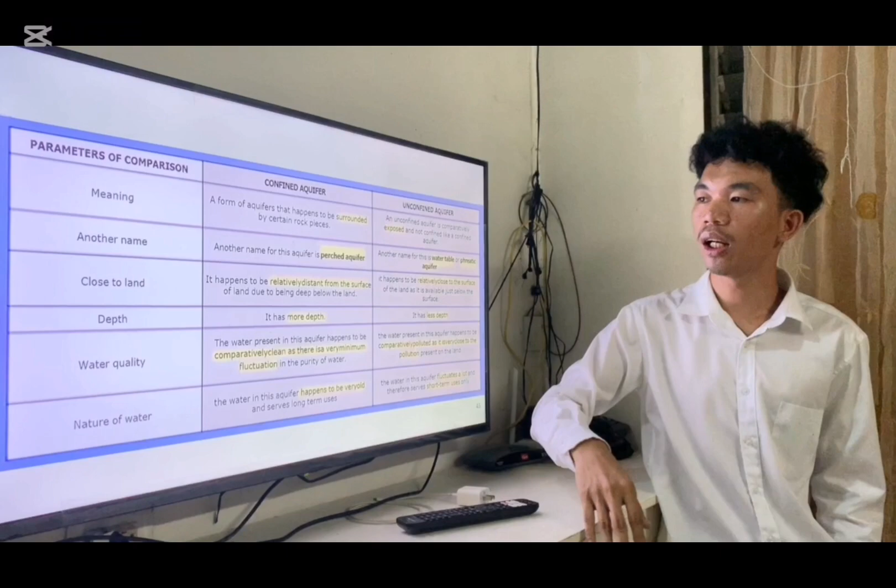Then about the nature of water in the confined aquifer: the water in this aquifer is very old and serves long-term uses, so it lasts longer compared to the unconfined, because the unconfined is closer to the land surface. While in the unconfined aquifer, the water fluctuates a lot and therefore serves short-term uses only. After it infiltrates from the rain, it is discharged in short-term uses only, unlike the confined one, which lasts longer because it is at the deepest part of the land. And that's all. This is the conclusion about the confined and unconfined aquifers.